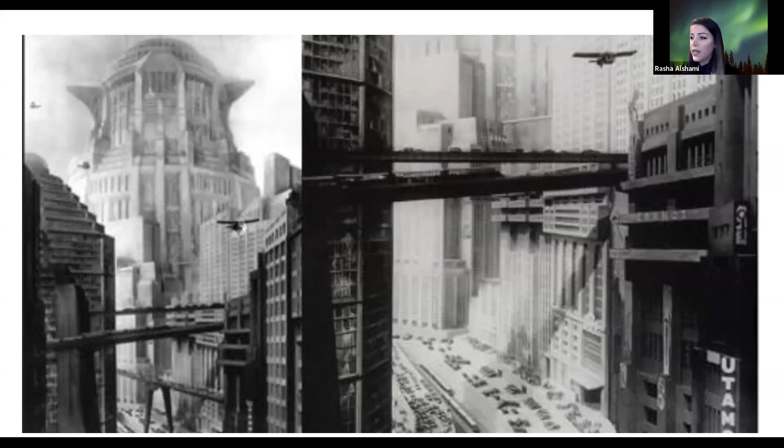Le Corbusier was and is one of the fathers of the modernist movement. He depicts in this example his vision of an ideal city with integrated futuristic mobility systems he imagined having flying vehicles, cars, and trains going through skyscrapers for fast and easy transport to accommodate the modern and futuristic life envisioned at his time.

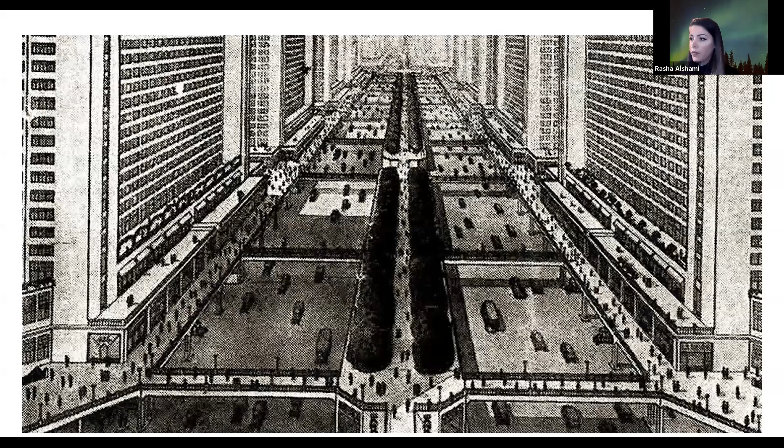Even though most of his dreams and drawings of an ideal city were not realized during his time, we can already start seeing some of his visions coming to life 90 years later, proving that architecture progresses very, very slowly and takes an enormous amount of time to advance compared to other fields such as aviation, aerospace, and automobile. There are multiple reasons causing this century gap: society's approval to change, political conflicts, lack of resources, a major gap between architecture and other fields, and being stuck with designs from history books, among many others.

But the most important one, in my opinion, is the lack of advanced technology integration. So if we want to have a glimpse of and contribute to what architecture will look like in the near and far future, we must integrate the technologies and resources we are provided with. If we start incorporating new technological tools and equipment, we can explore new horizons in architectural design and have a faster-moving architecture than the one we're used to and see all around us.

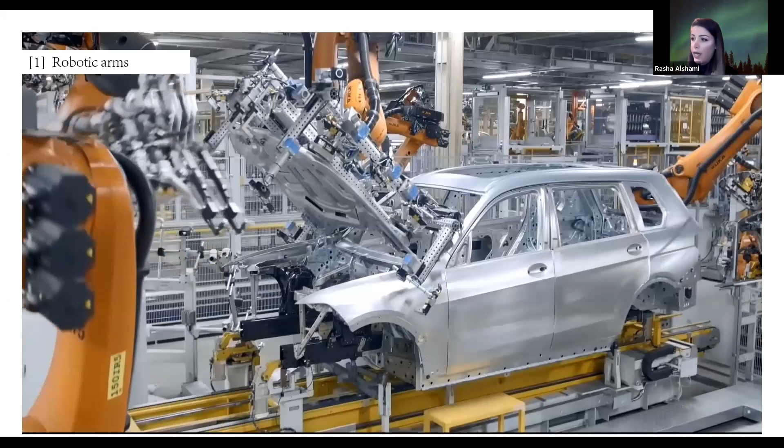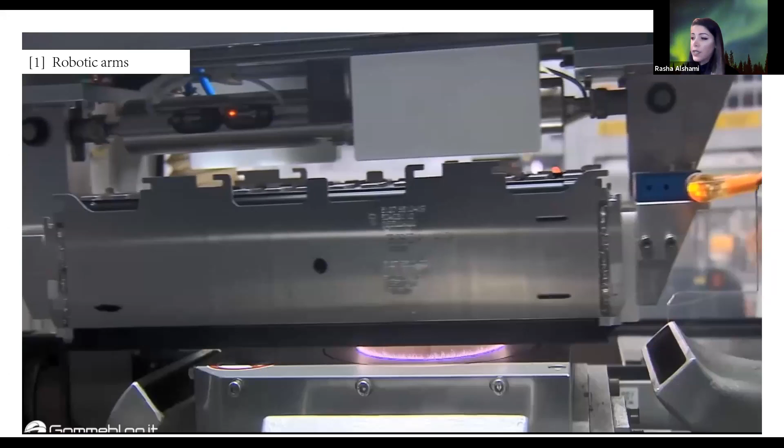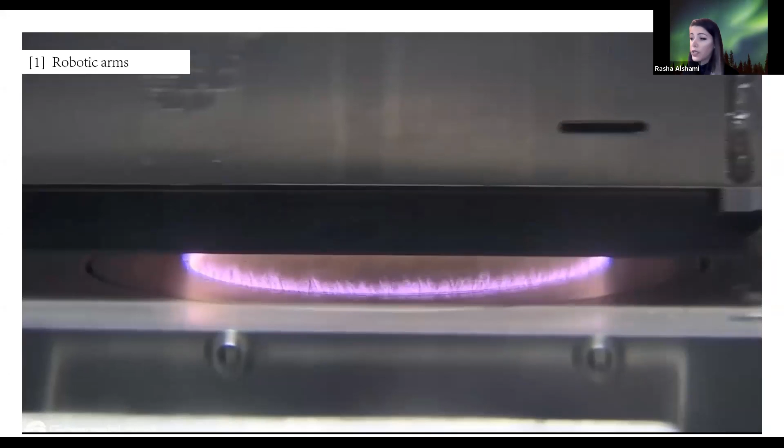Before we go into architecture, I wanted to share some examples of advancements in other industries. Aerospace and automobile industries have advanced way faster than architecture did. For example, BMW cars are manufactured with robotic arms for a fast and automatic manufacturing process. This happened through incorporating the latest technologies, allowing automobile industries to move forward and giving them more time to explore design geometries and complex forms optimized for their functions.

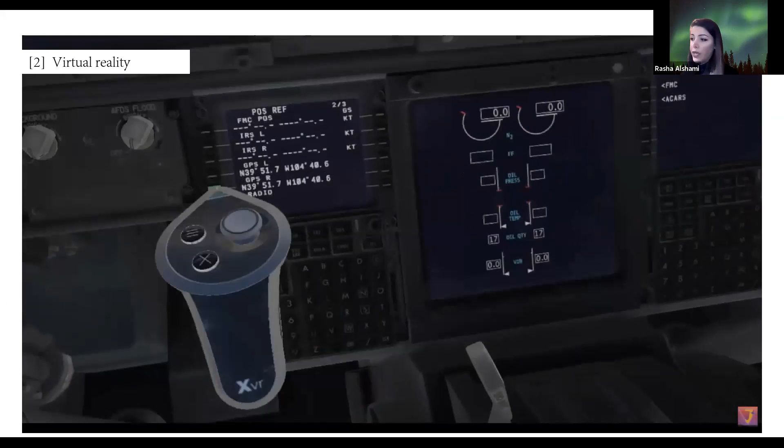In the last decade, we also saw the aviation industry inspired by video gaming applications, incorporating virtual reality into pilot training. VR flight simulators are becoming the future of pilot schooling. During training, flight simulators allow students to interact with a real airplane cockpit. This way of training saves fuel and can replicate hazardous conditions and system failures without putting any real-life passengers at risk.

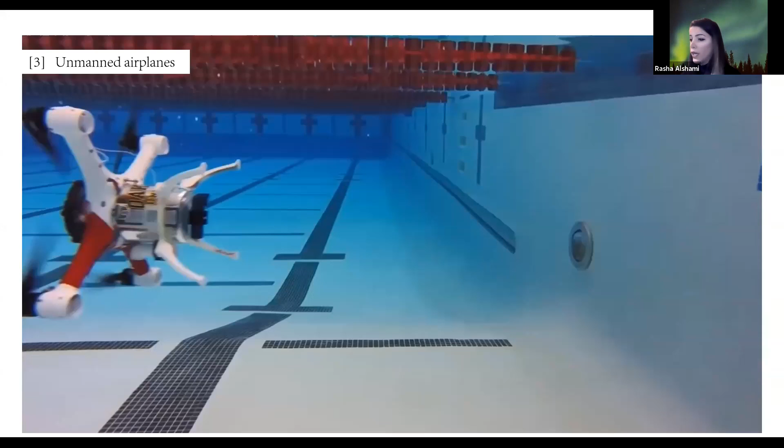Of course, unmanned flying drones have been around for more than two decades, but their roots date back to World War I, when both the US and France worked on developing automatic and unmanned airplanes. Drone technology has developed in the last few years to the extent that individual commercial entities and governments have realized they have multiple uses, such as express shipping and delivery, gathering information, rescue operations, geographic mapping of inaccessible terrain and locations, and much, much more.

Now we're starting to see a merge between the fields of aviation and automobile. For example, Lilium is already crossing this boundary by offering the first all-electric vertical takeoff and landing aircraft with room to fit 4 passengers and a pilot, making it the first 5-seater flying taxi providing a powered ride-sharing and air taxi service booked through a smartphone, to be offered to the public in 2025, taking mobility and transportation to another level.

These fantastic examples in other industries bring up the question of how architecture can benefit from this technological platform and how we can utilize it in our field. Architecture research institutes have already started researching this integration, and that was during my master's studies. When I was doing my ITech master's, I had the opportunity to learn, work, and assess multiple architectural examples that I will present in the following slides.

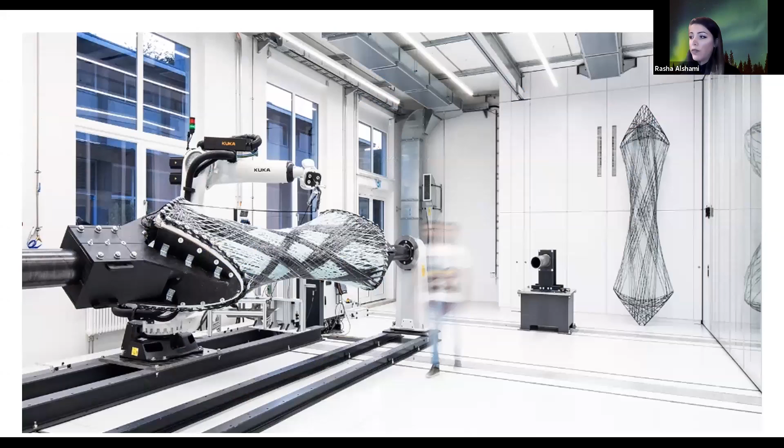Starting with the Buga Fiber Pavilion, fabricated in 2019, this demonstrates how combining cutting-edge computational technologies with construction principles found in nature enables the development of futuristic and novel digital building systems. The Buga Fiber Pavilion was robotically manufactured by weaving fiber composite filament, providing a highly effective and exceptionally lightweight structure, making it approximately 5 times lighter than a conventional steel structure.

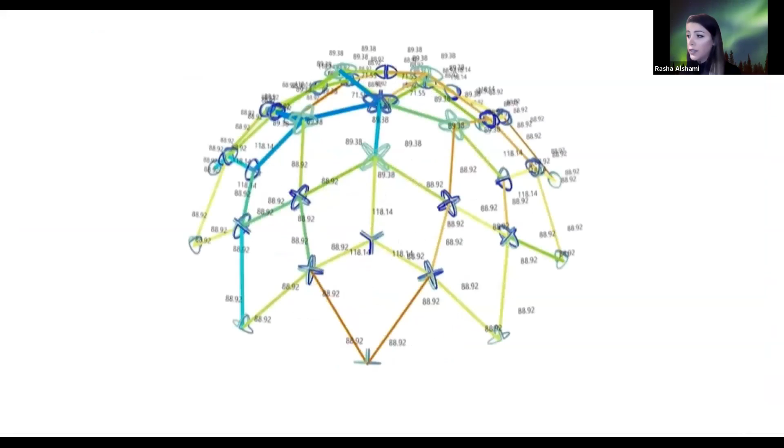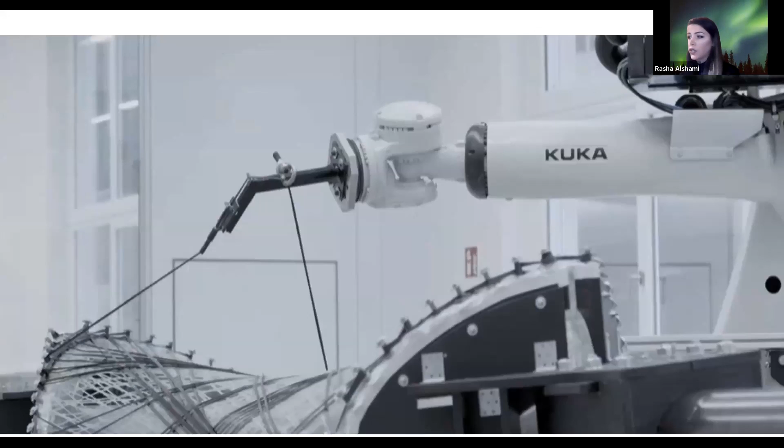The building components are produced by robotic coreless filament winding. This novel additive manufacturing approach, pioneered and developed at the University of Stuttgart, is achieved with a nonlinear workflow where architectural design, structural engineering, and robotic fabrication are developed in continuous computational feedback, making the pavilion structurally tuned and architecturally articulated because of its fiber arrangement.

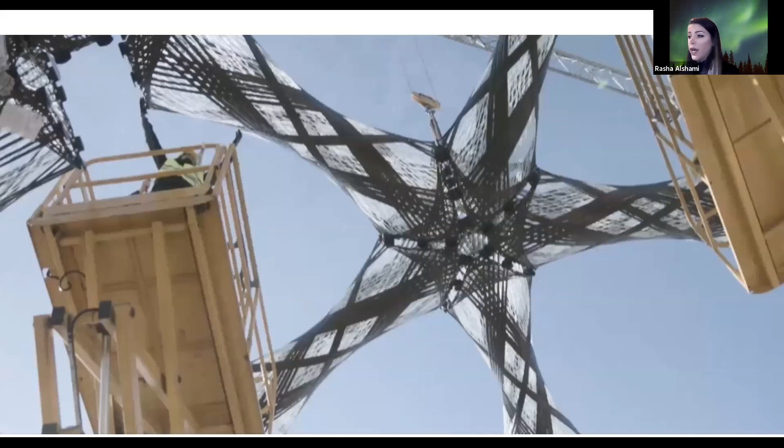This arrangement of the fibers was individually calibrated to the piece's requirements, defining each component's fiber density and orientation, emerging with a filament interaction that defines the shape of the building and eliminates the need for a mold or core, resulting in a bespoke form and individual fiber layup for each component, with no economic disadvantage and no production waste or material offcuts.

Moving on to the second example, the ICD ITKE Research Pavilion 2016-2017 stands out for its long span structure, its composite material implementation, and its collaborative robotics setup. The material properties of fiber composites are astonishing because composites have been heavily used in highly engineered applications, such as the automotive and aerospace industries, and they also have outstanding potential in architectural applications.

Lightweight fiber composites provide unparalleled performance within architectural scale productions, allowing performative architectural outputs where material self-weight is of high concern for large span structures.

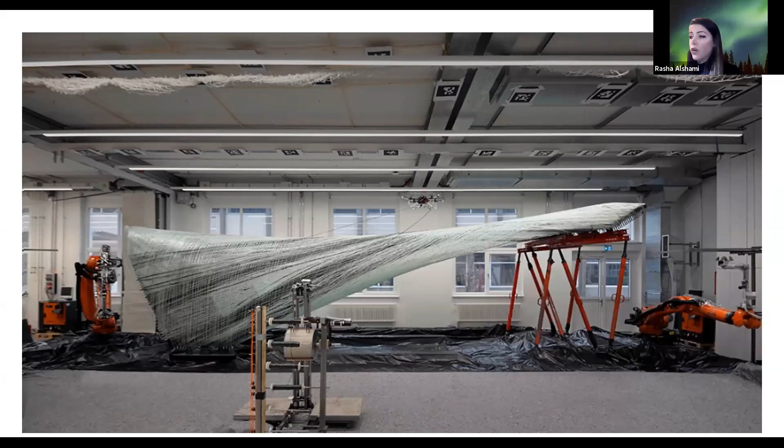Here, the collaborative setup came out as a requirement because of the long span structure. It was best suited to use multiple robotic systems that could interface and communicate to create a seamless fiber laying process. The fiber process passed between two robots and a drone to ensure a continuous material structure, as you can see from the picture.

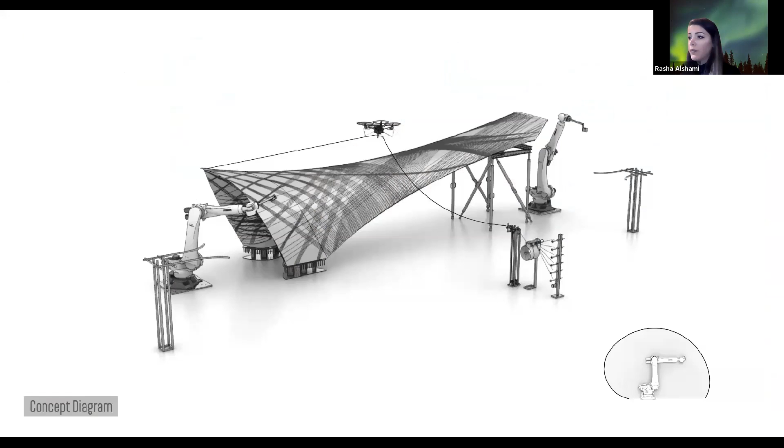In this video, you see the pavilion standing out because it was inspired by the leaf miner caterpillar to create this pavilion, with a volumetric winding fiber directionality, as well as...

Hello? I think—can you hear me? Yes Rasha, everything is fine. Sorry, it must have disconnected from my side.

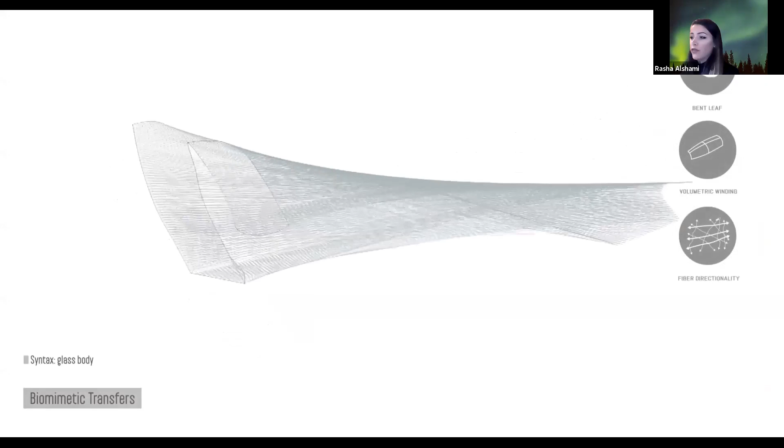Okay, so following up, here we see that the reinforcement was achieved through computational feedback loops feeding into multiple machines, creating a fabrication process concept based on the collaboration between strong and precise yet stationary robotic arms with limited reach and mobile long-range drone machines with limited precision.

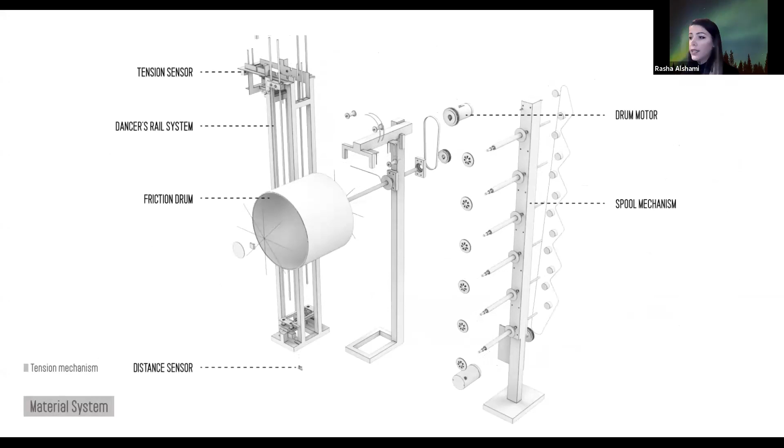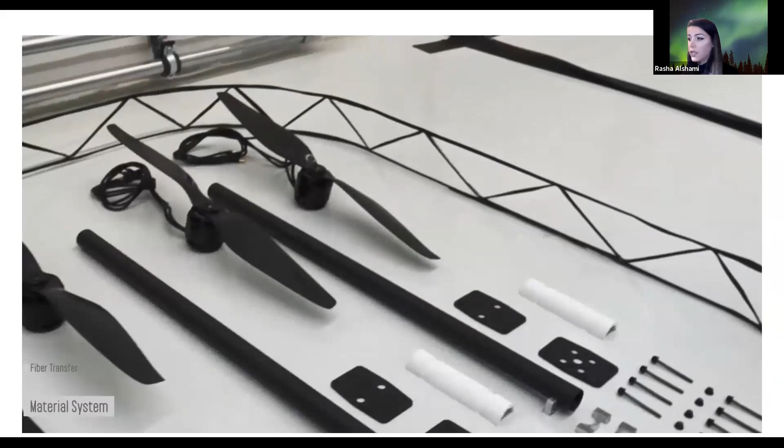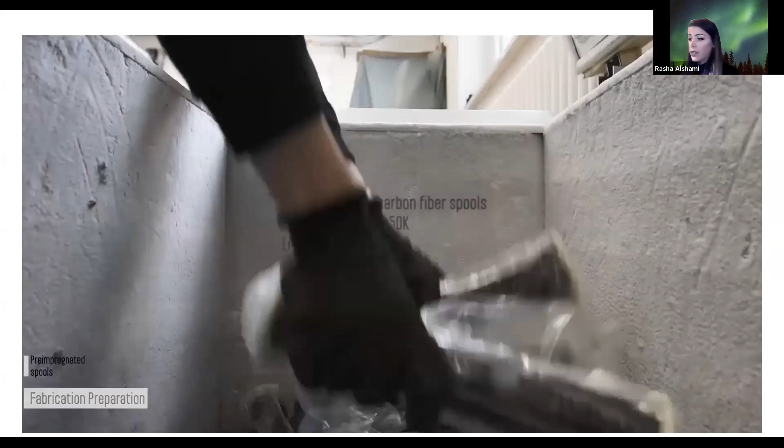This adaptive control and communication system was developed to allow multiple industrial robots and a drone to interact through the winding and fiber laying processes, through an integrated sensor interface that enables the robots and the autonomously flown drone to adapt their behaviors in real time to changing conditions during fabrication, resulting in a collaborative machined architecture.

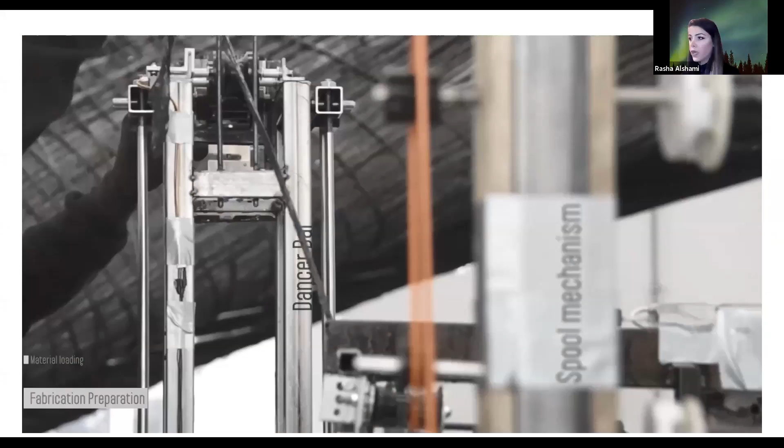One could also argue, after the first two examples, whether we are able to teach these robots. The answer is absolutely yes. Here is our last example of this list, presenting a machine-learned robotic recognition for building operations.

In this example, the implementation of a neural network approach and machine learning to provide digital building operations picks up on a simple, old, traditional method of stone stacking and transforms it into a machine scenario to provide autonomous construction in areas that are hazardous to humans, such as the moon or Mars.

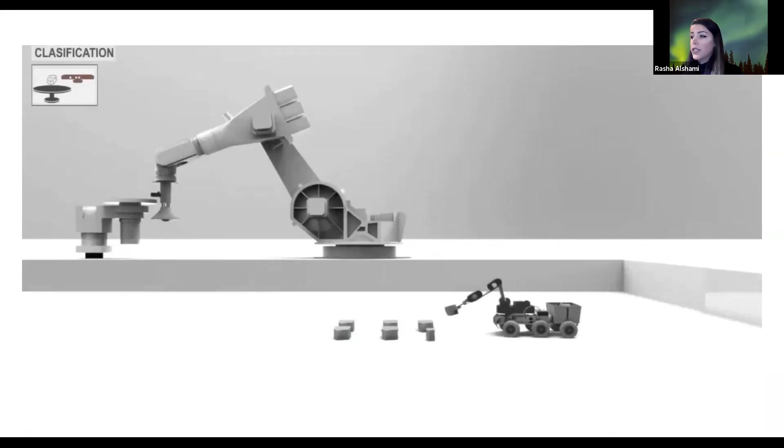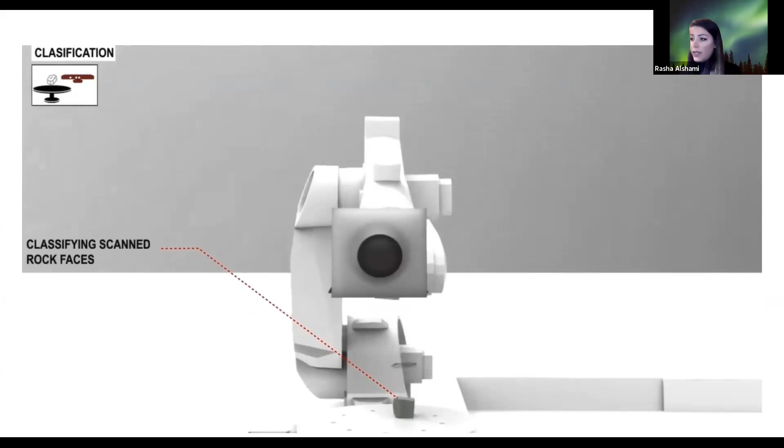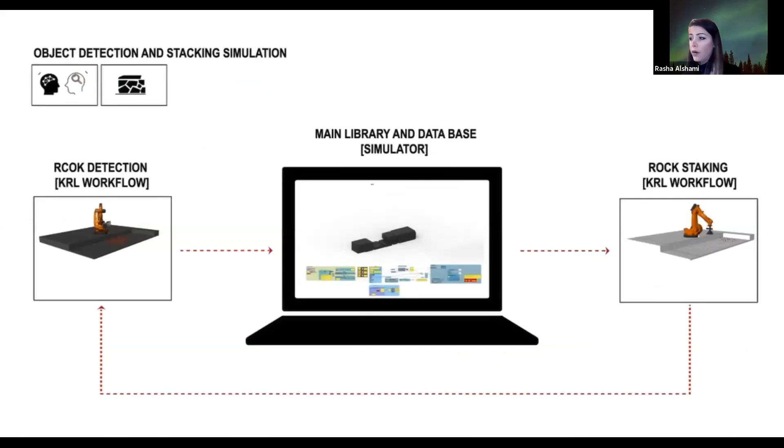This process works through teaching the robot using scanning processes and saving data in a computational base, where once similar items in shape are on the ground, they will be detected in the next step, and the robot will create a stacking simulation for a quick checkup to see if the item fits one of the configurations based on developed principles, which are enhanced over time, resulting in a collaborative robotic scenario.

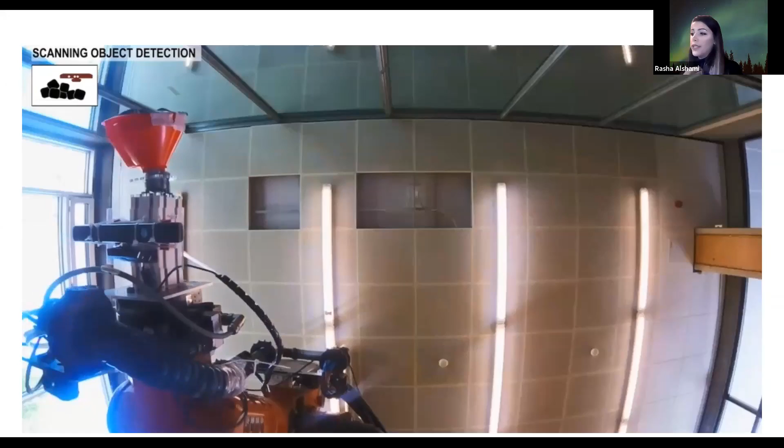These three architectural research examples that I've shown earlier, out of many, many more, open doors for design innovations and will transform the way the future built environment is thought of, materialized, and designed, resulting in a multidisciplinary design culture and a more collaborative design environment. This shifts our methodology into a system where design, engineering, material, construction, fabrication, and building coexist and work together to create outstanding architecture that is more in tune with our time.

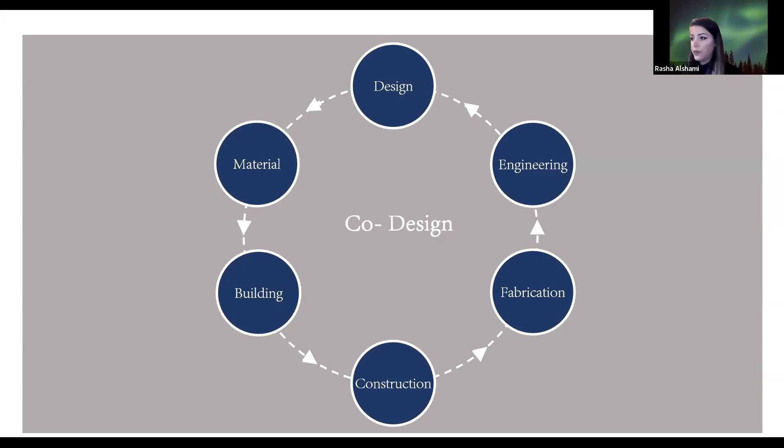Being exposed during my past years to these innovative and novel environments really helped me shift my traditional methodology to a more advanced one, learning that architecture must be a collaborative field with our industries. I would like to present in my next and final slides a documentation of my progress and shift to develop the technical and intellectual ventures that I have been exposed to.

In these lines, I picked up 4 relative projects which I worked and collaborated on to present examples of how architecture can coexist in a more collaborative field, and how the merge of biology, architecture, and technology could result in fascinating outputs.

Starting with biomorphic as beauty. Biomorphic is the use of formal geometric elements found in nature as a source of inspiration for aesthetic properties in designed architecture. For example, a historic example of biomorphic architecture dates back to Egyptian, Greek, and Roman cultures,

using tree and plant forms in the ornamentation of structural columns. Here I present an example of biomorphic architecture: the Qataf sculpture. Standing as a concept for an urban furniture to provide shading and seating, this was based on extracting design principles from the famous and national Jordanian flower.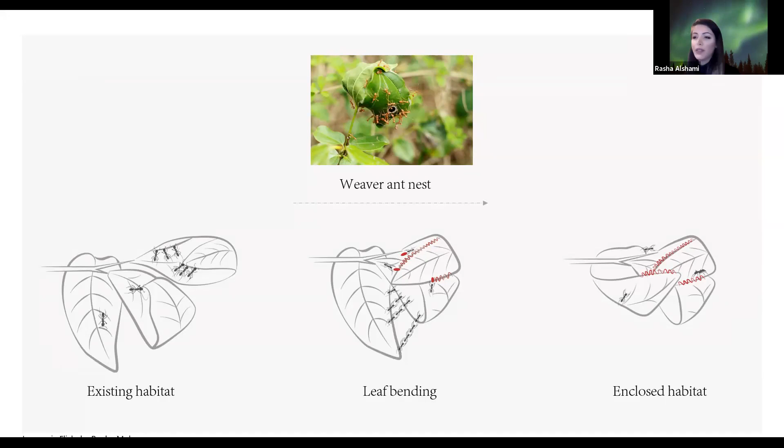transforming a simple 2D leaf into a 3-dimensional shape. This makes it quite fascinating to me to see how those small architects behave and cope with different environments to build and solve their houses.

After documenting the ants' behavior and making various system models, our class was able to replicate that information onto a conceptual architectural simple start model that can adapt and reconfigure in shape with simple bending movements and result in 3-dimensional spaces.

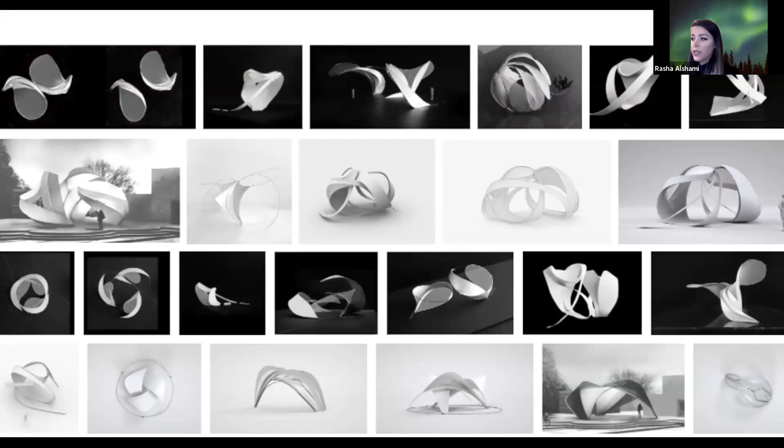Following that model, many designs and iterations were studied to better understand the movement in relation to the material properties and overall design. There were also various material tests to check the material flexibility against the bending process, and fiber composites came first, with their resilience to bending processes and lightweight.

After that, various teams collaborated together, and a design was selected to contribute to the research of adaptivity and reconfigurability, providing 2 spatial conditions, an enclosed space and an open space, resulting in a design that heavily relies on the material and structural properties of lightweight systems using bending-active properties of the composite materials.

The 2018 ICD-ITKE Pavilion contributes to this research of adaptivity and reconfigurability, creating an architectural system that can change its physical properties and supports the formation of different overall geometric configurations during fabrication and on-site construction processes, enabling the pavilion to adapt to various environmental conditions through ground motors and sensors attached to the carbon fiber plates.

Moving to my third architectural experience, design as environmental response had a great impact on my shift. I realized that architecture always strives to move towards radical increases in resource efficiency and work in a closed loop model rather than a linear one, and rely on solar energy instead of fossil fuels.

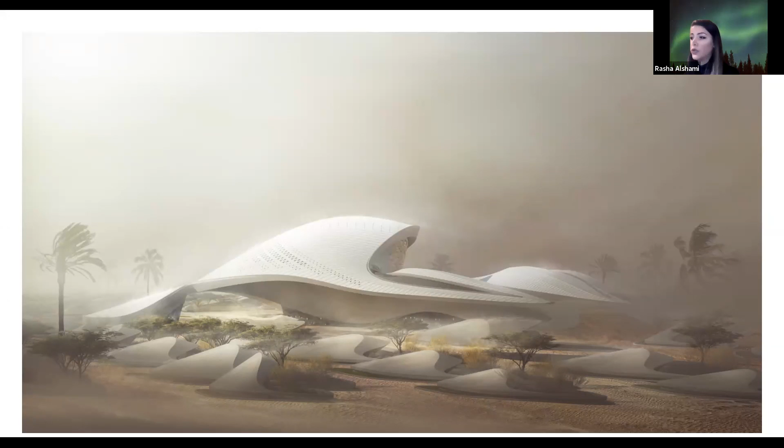The design was informed by its desert context as a series of intersecting dunes oriented to optimize the prevailing north winds, and was designed to provide the interiors with high quality daylight and views while limiting the quantity of glazing exposed to the harsh sun.

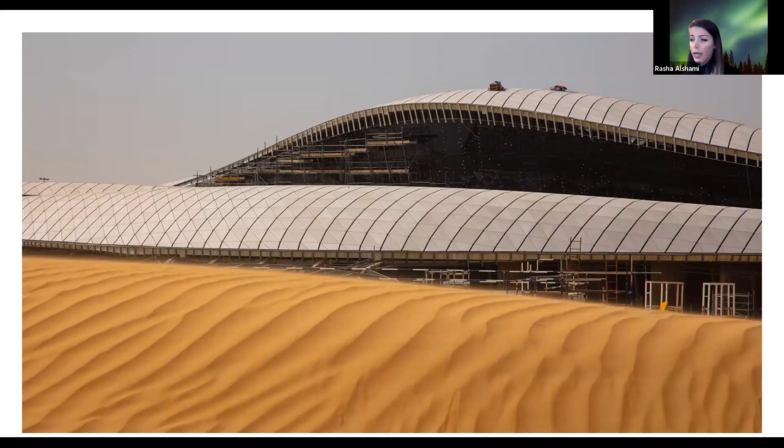As for the exteriors, the finishes of the building have been selected to reflect the sun's rays and help further reduce energy consumption by providing a local heat profile akin to the natural desert environment. Even though the BEEAH headquarters is a man-made architectural system, it's actually a great example of a sustainable environment and environmental construction.

Which brings me to the last part of my design talk for this evening, and my knowledge share on how we can merge architectural research and design principles to give birth to a bespoke architecture that adapts to new technology. Lilium Air Taxi is focusing on creating an integrated system offering a high-end electric jet and an adaptive vertiport that incubates this flying technology.

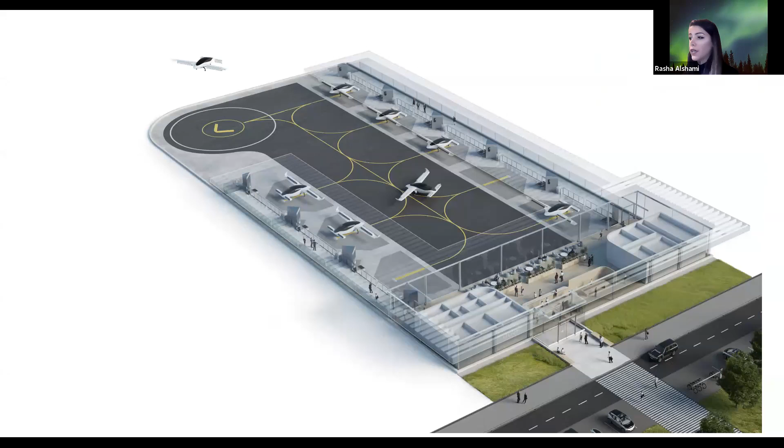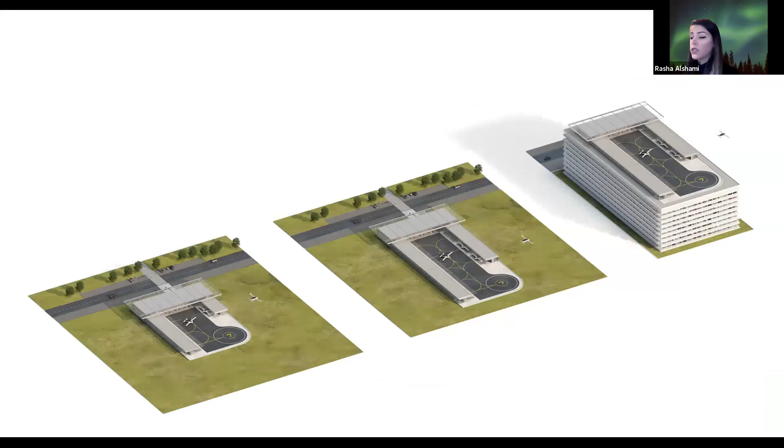Our designs are based around a set of standardized modules, making it simpler and more affordable for developers to plan a vertiport for their specific site. The modules can also be prefabricated off-site, reducing cost and allowing for rapid on-site construction.

This is the kind of architecture that is extraordinary. It's adapting to the high demands of bespoke and advanced technology through a base of optimized design solutions and studies, setting up the foundation for architecture of the future that is aligned with our age and our technology.

I would like to follow what I presented earlier and end my design talk for this evening with a question for the audience: what can we do as architects next? I'd like to thank everyone for joining and tuning in, and please don't hesitate to reach out on my social media and connect.

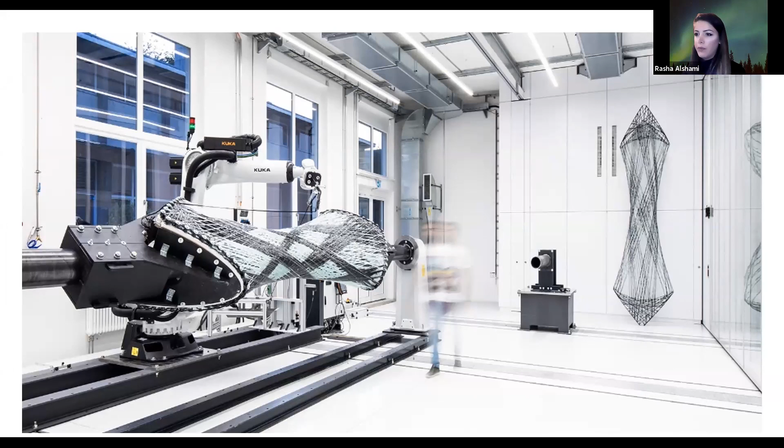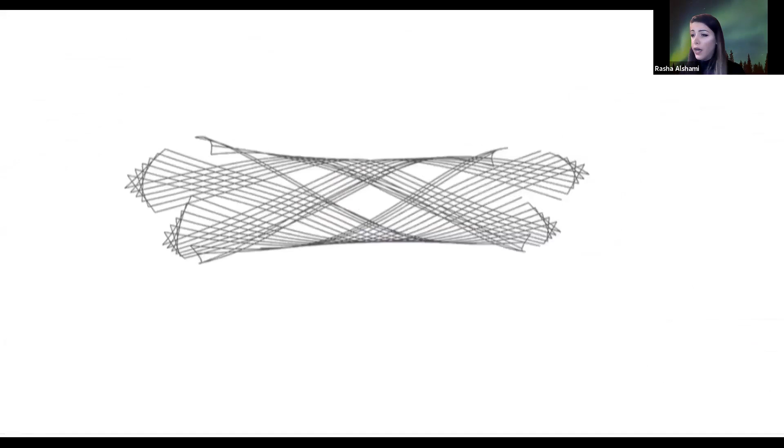Here, the winding of the filaments are hooked onto two pieces, as you see, on that core. You have the robot moving from one side to another, winding around the hook of each piece and then going back. Perhaps I can move the video a little to help explain more. So we have these two sides of double curvature, and the robot is winding around the pins on each side of the component.

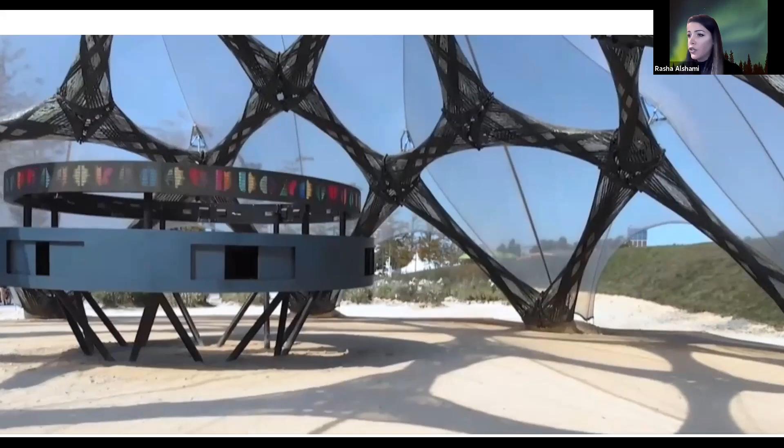This is done with computational tools where there is feedback between each component, so each component is optimized for its location with fiber winding. We see glass fiber and carbon fiber used for each part — glass fiber is great at taking tension forces, and carbon takes compression forces. Each component has been well placed for its specific location.

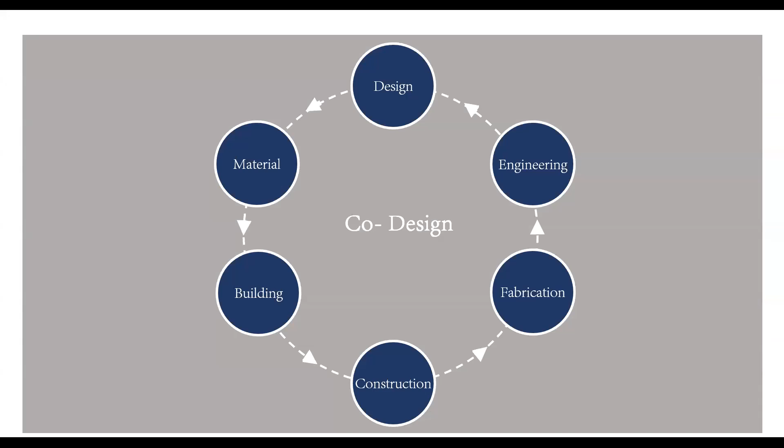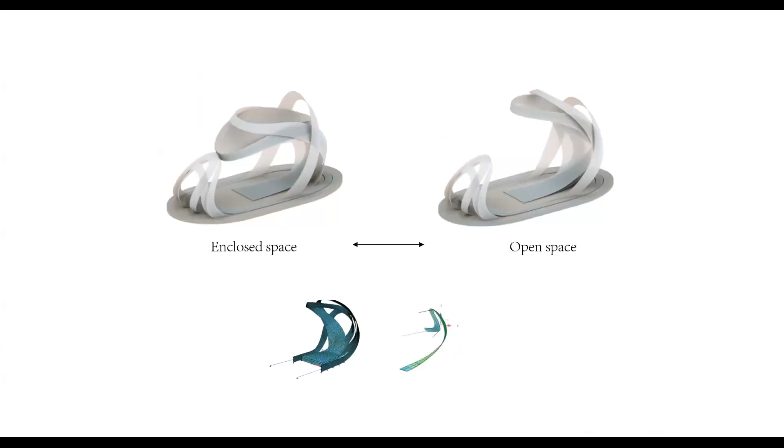The project of Zaha Hadid, although it's beautiful and has some logic—least exposure to the sun and right exposure to the preferred orientation—but then what? There are many other things: ventilation, the possibility of double roofs. There are more sophisticated systems that respond to the environment than what I see here, which is beautiful as shapes.

So the first question is the environmental response. The second question is the social response. How can these technologies help in social housing? Social housing may constitute something like 70 to 90% of our environment, and if we don't do something serious, we end up with squatters.

That's all, but I appreciate very much your work. Thank you. Thank you, Dr. Abdel Mohsen, for the questions. I hope I understood your questions correctly.

So the first one is, how is the BEEAH headquarters corresponding to the environmental context, not only on a ventilation system? Am I right? Or I'm not sure—perhaps you can help me understand your first question.

What I'm trying to say is that in environmental response, architectural response to the environment, there are many things connected together. What we saw in the project of Zaha Hadid is probably one aspect, a limited aspect. It's beautiful, but the environmental response is limited, and in traditional solutions there are richer solutions. I have to say that.

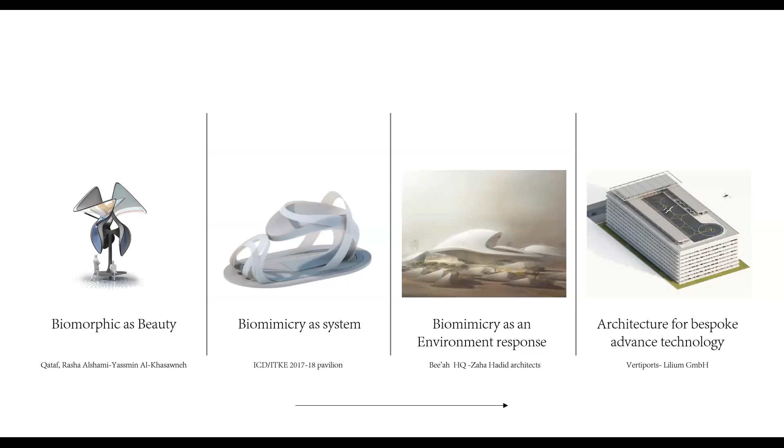Okay, there is another question from Muhammad: is biomorphic a bottom-up approach or top-down? Oh, I love that question.

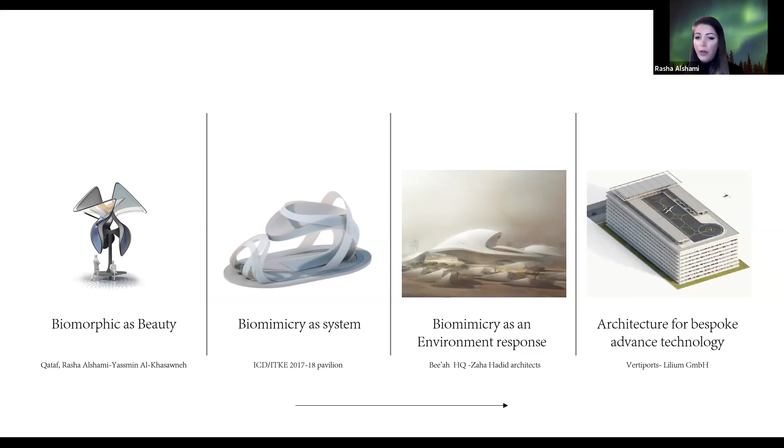Muhammad, it's not about biomorphic, it's about biomimicry—there are two different approaches, as you mentioned: top-down and bottom-up. When we are working, we use biology as a base, so it could be a bottom-up approach. In the weaver ant example, it was a bottom-up approach where these weavers were the base for the design, as well as for the second project, the ICD-ITKE Pavilion.

But it could also be a top-down approach, where you're designing something and then you notice that there's an animal or creature doing the same thing, so you're re-informing the design after you've designed it. So it could be a two-way approach, depending on what you're using. Biomimicry is just a principle, and bottom-up and top-down are approaches. That's actually one of the first things I learned during my master's studies.

Okay, there's a question from Tamer: to what extent do you think the biomimicry that you mentioned can be the answer to our environmental problem, and how do we measure or critique the effects of those organic free forms, as they don't follow the Euclidean geometry of flat two-dimensional spaces?

Oh, hold on, that was a long question. Let's start with the first part of it.

To what extent can biomimicry be an answer to our environmental problem? It's not necessarily an answer. Biomimicry is basically a principle that you can apply to your design question. So, for example, if you see that you have a problem in your design, biomimicry is a solution—it's providing a solution for your design.

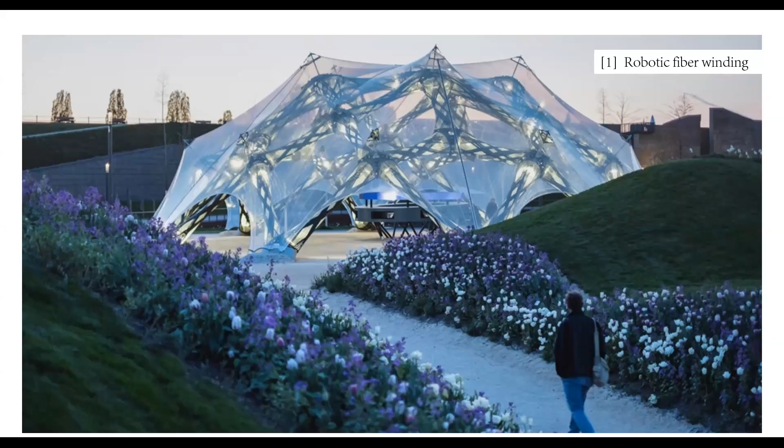Measuring what? Perhaps I can help by explaining in general how we deal with non-Euclidean geometries, non-uniform or organic geometries.

When we're trying to fabricate these free-form organic shapes, there are two ways. One is using molds, like for cars or planes that have dynamic shapes. Molds become really expensive and can result in a very uneconomical output.

Another way is to subdivide a geometry that has a free-form shape, split it into parts, and figure out the form of each part to create a more Euclidean shape. For example, this shape has curvature, and the components create the curvature of the form. That's probably the answer to your question, Tamer.

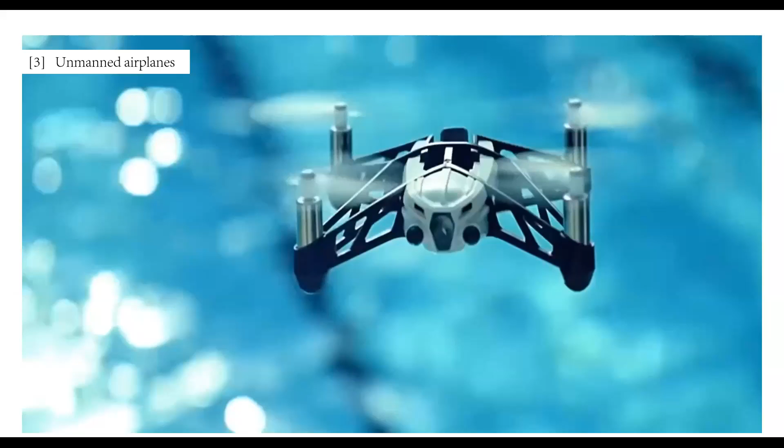Following Professor Abdel Mohsen's question, we had questions about these technologies and how we can use them in developing countries in the Middle East. What would be the first step for us to start practicing or using these technologies besides just learning them? How can we practice?

I've been away from Jordan and the Middle East for a long time, but I've heard there have been a lot of technologies, like robots in Jordan. I'm not sure how true that is, but when I say technologies, it's not necessarily robots or VR. Everybody has access to VR, or a drone, through things like a PlayStation. As I showed in a previous example, there's a drone moving filaments from one robot to another.

I think the question is, what can you do with a drone, and what can you do with a VR? Maybe you can create your own mini robot. The softwares we use are also a technology - we weren't using these softwares in our daily lives 20 or 50 years ago. I think these are part of the technology we deal with daily. So the question goes back to the person who asked: what can you do with some of these examples to create a new type of architecture?

Okay, the last question we had from Muna. When we talk about biomimicry, does it always mimic the form, process, and ecosystem, or can it mimic only one aspect and still be called biomimicry?

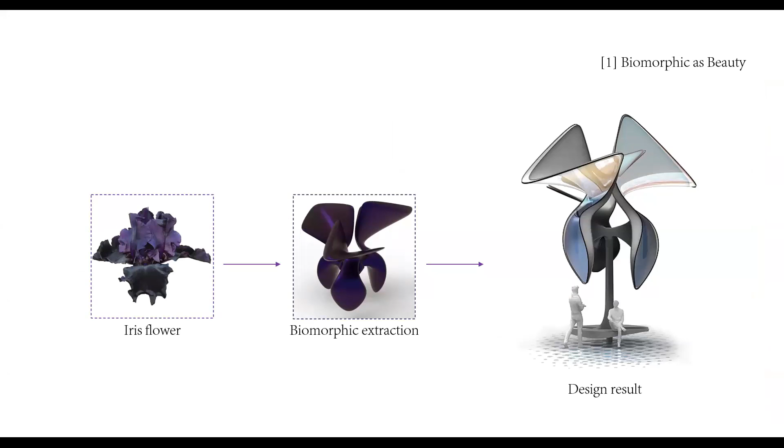That's a great question, Muna. Biomimicry can mimic anything. I can give you an example: the fast trains in Japan were built based on a biomimicry approach. They used three animals - the penguin, a bird, and another animal I can't recall - just to make the train faster. It actually went 10% faster than a normal train.

So biomimicry can be used in our daily lives. As humans, before we had houses, homes, or technologies, we looked at how animals build their houses and nests, and got our inspiration from there. That's why, even though we have technology and this amazing platform, I still believe we need to go back to nature to understand where we are and the basis of what we're designing.

I think this was also one of the reasons for the transitional shift I had. When I say transitional shift, it doesn't mean I don't do what I did 8-10 years ago - I'm still designing the same way you're designing as a student. However, I'm implementing these technologies and the knowledge and experience I've gained throughout these years to create the designs and architecture we have today.

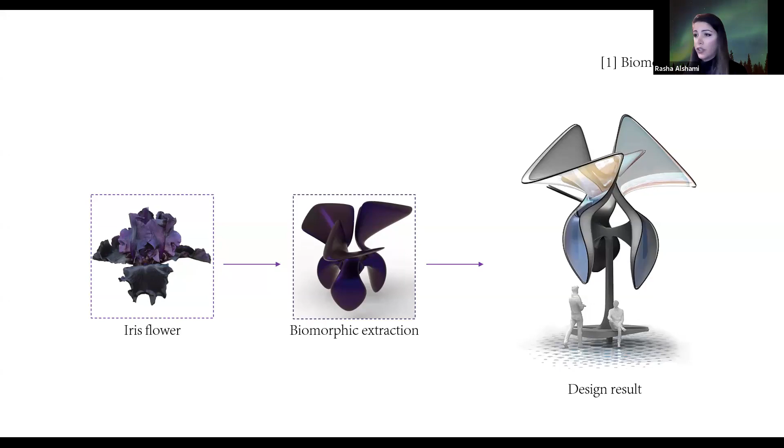And as I've shown with the Lilium vertiports - I think this is very extraordinary because we will have flying cars, a technology coming in 2025. We have to think about the architecture that will incubate it and make it happen. These vertiports serve such an important function for this technology, and the way Lilium thinks about this as an integrated process is really fascinating.